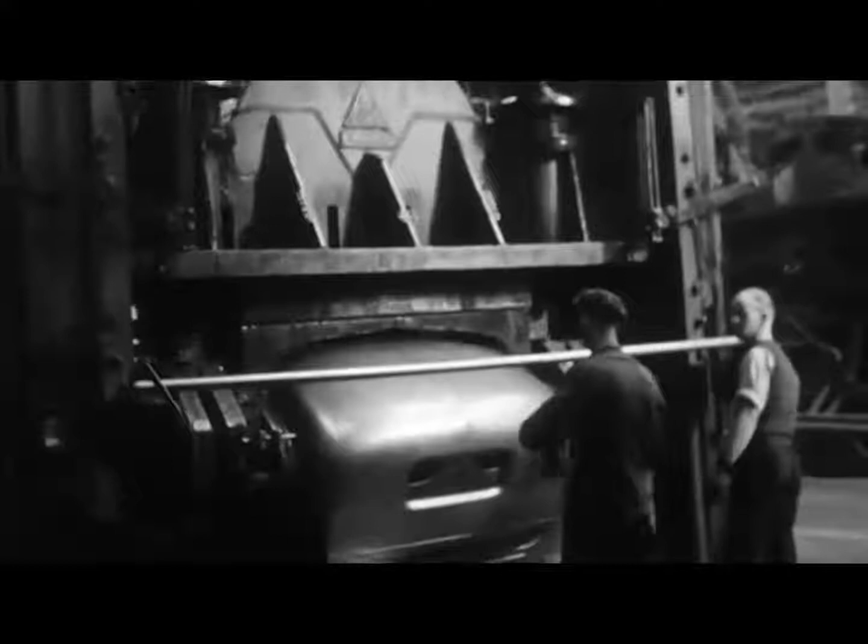Since the inception of manufacturing, factory owners have looked for ways to increase productivity and lower cost. This resulted in many of said factory owners looking to automation to help their bottom line.

So what is automation? According to the Merriam-Webster Dictionary, automation is the automatically controlled operation of an apparatus, process, or system by mechanical or electronic devices that take the place of human labor. What does that really mean?

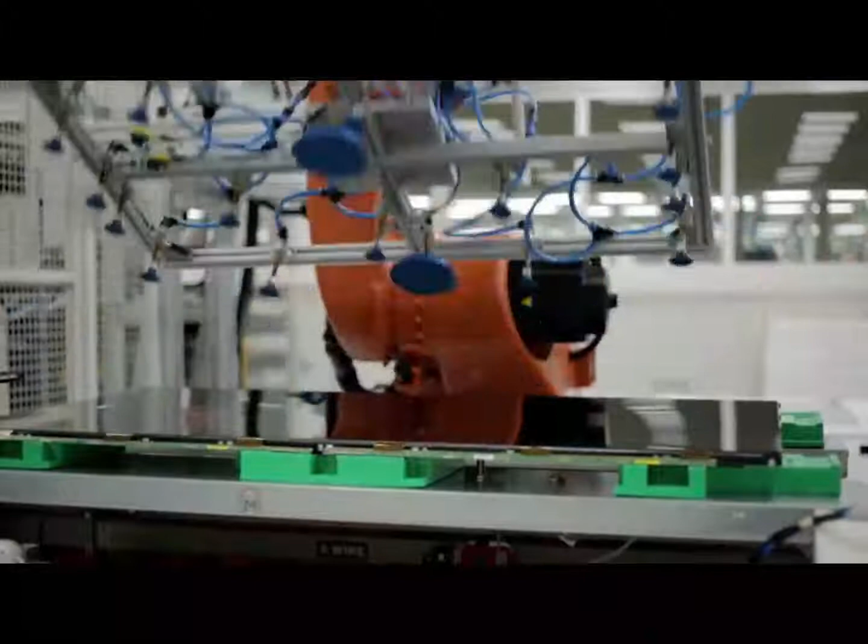If you walk inside a modern manufacturing plant, you might see something like this: robots and other automated machinery that can run typically without the need for human involvement.

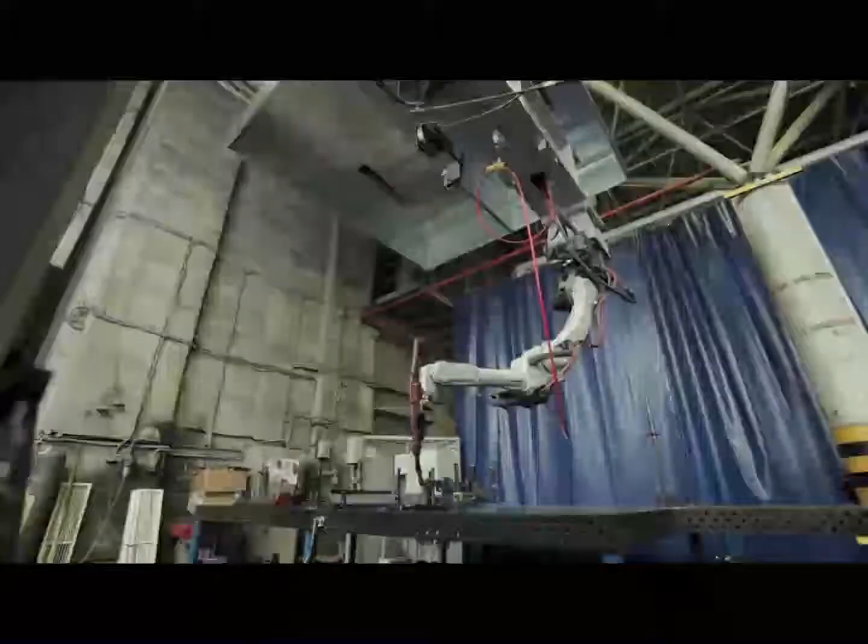Automation results in better efficiency. Let's face it, humans make mistakes, and they're not always very consistent. Automation practically eliminates error, increases productivity, and allows for better monitoring and control of the manufacturing process. Automation also allows for a certain task to be replicated over and over again.

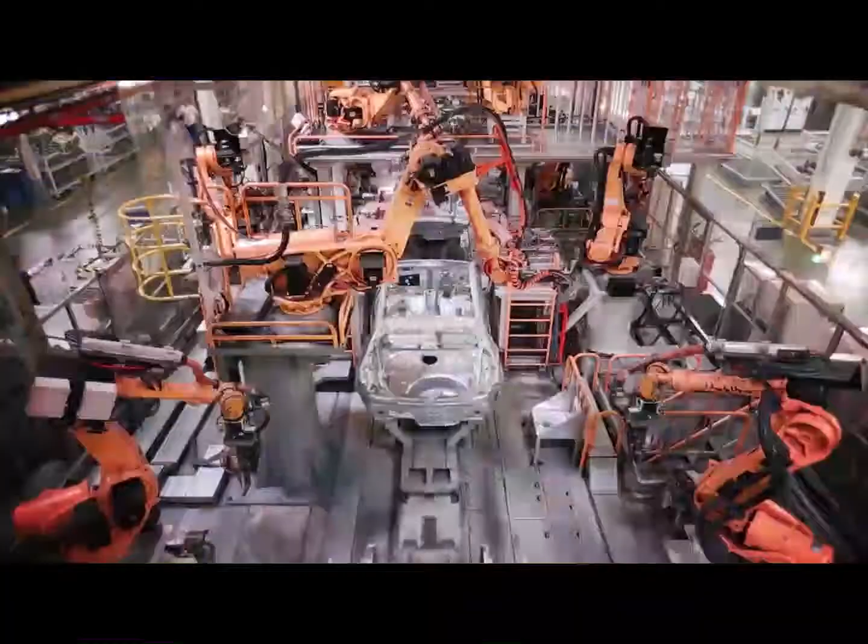Robotic automation started showing up in factories in the 1970s, and as time has passed, the technology has become even more sophisticated. As it advances even further, it is not outside the realm of possibility that one day manufacturing facilities could run without the need for humans on site at all.

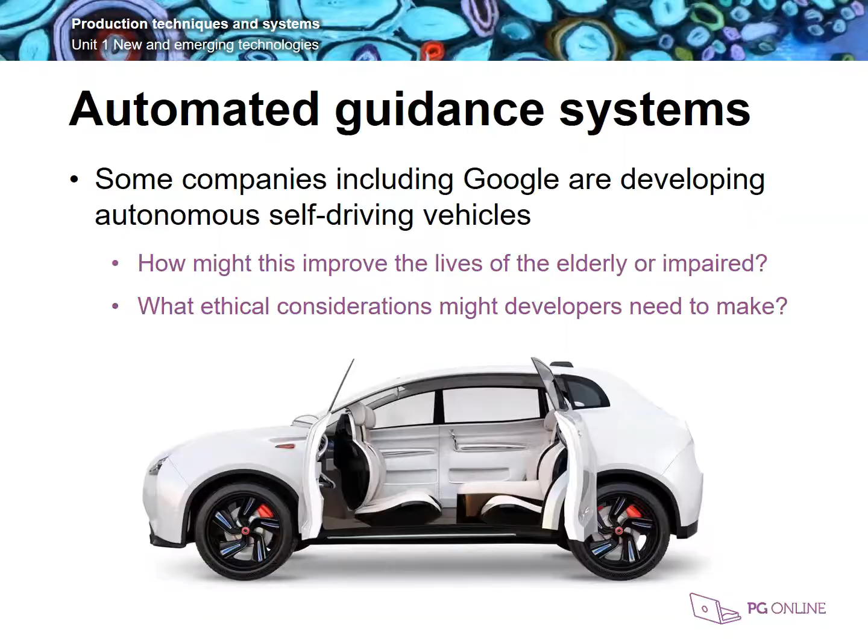Volvo Cars and Uber now present Volvo Cars' first autonomous drive-ready production vehicle, the next step in the strategic collaboration between both companies. The design is based on the refreshed Volvo XC90, with extra technology added to help support a safe introduction of autonomous driving.

The car's development is a part of Volvo Cars' commercial agreement with Uber for the delivery of autonomous drive-capable base cars.

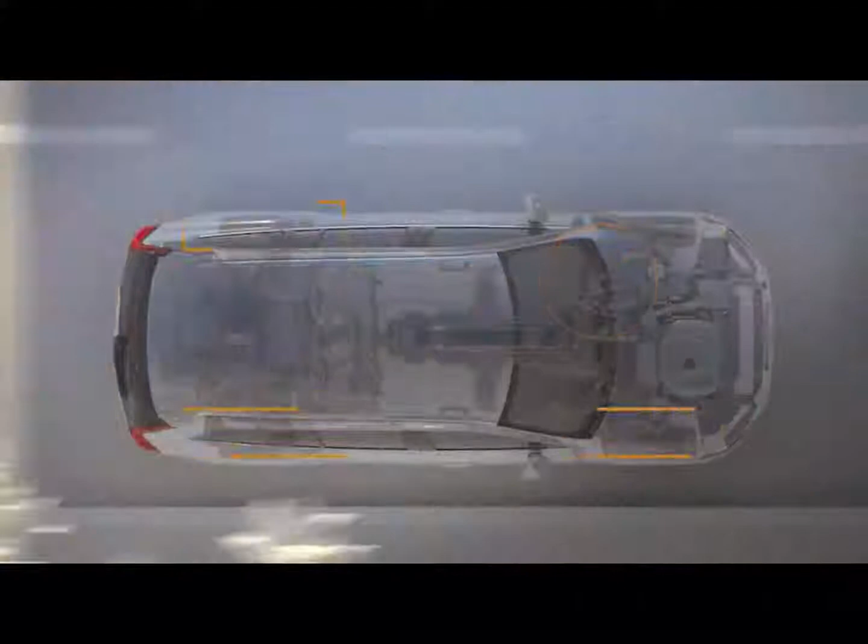An important feature of the autonomous drive-ready car is the inclusion of backup systems for functions such as steering, braking, and the 12-volt battery. This means that if any primary system would fail for some reason, the backup safety systems are designed to act immediately to bring the car to a stop.

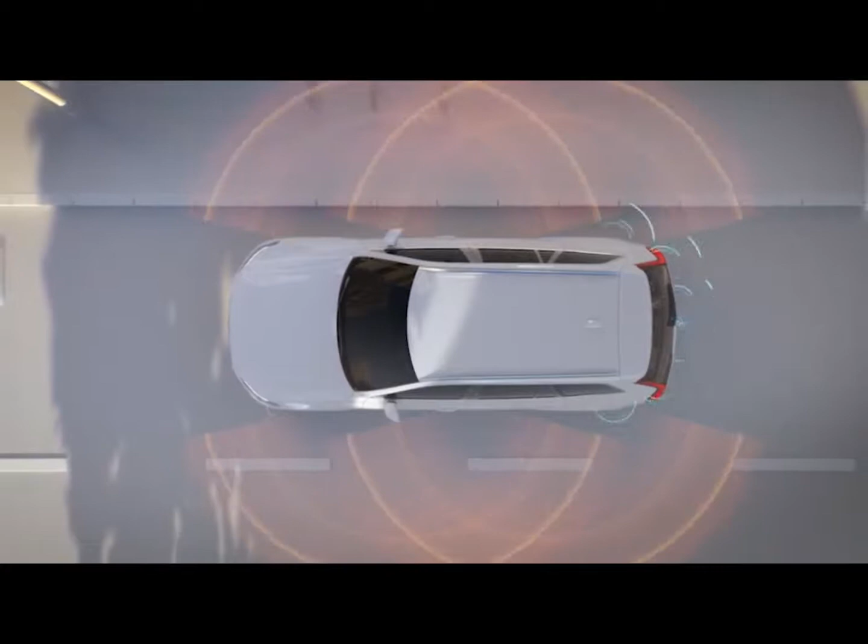Beyond this, an arrangement of ultrasonic sensors and cameras around the car create a 360-degree near-field perception capability designed to help the car safely monitor its close surroundings. The cameras are fitted with individual cleaning nozzles to maintain visibility while driving. A new vehicle motion control function translates a computer-calculated path into car movement.

Volvo Cars' first autonomous drive-ready production vehicle will be supplied to Uber as a base vehicle for Uber to modify with its own technology and systems, including its autonomous driving computer and roof box sensor kit that can enable the car to drive autonomously.

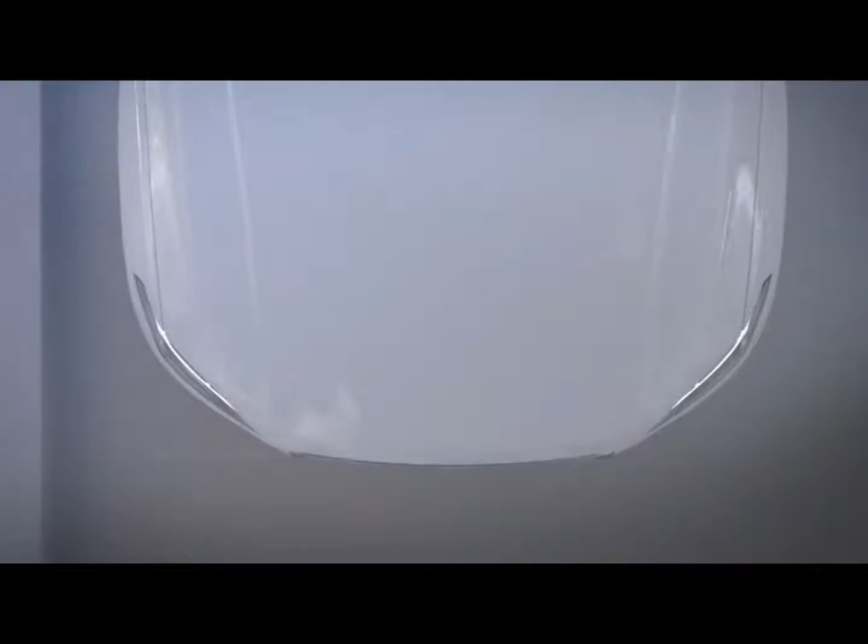Volvo Cars is developing a similar base vehicle concept for its future autonomous drive vehicles.

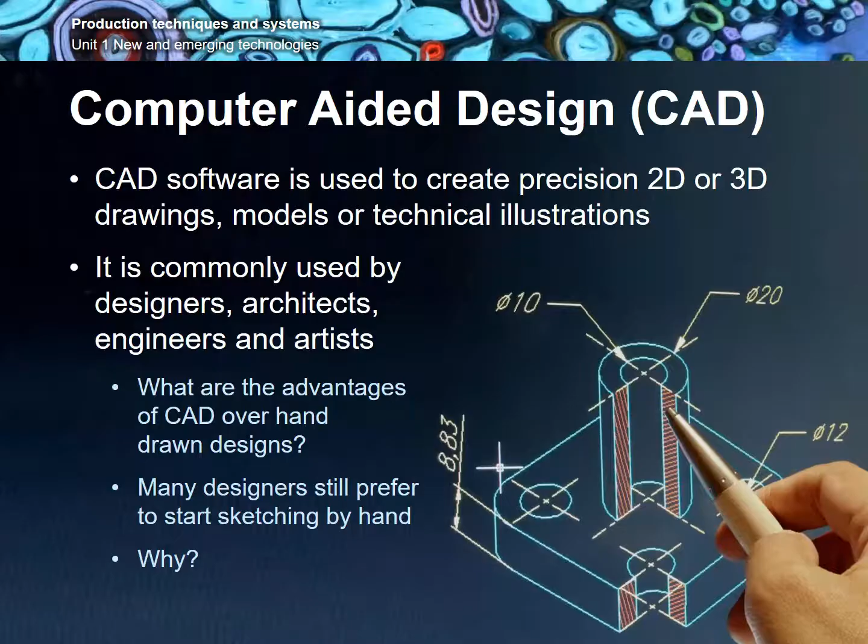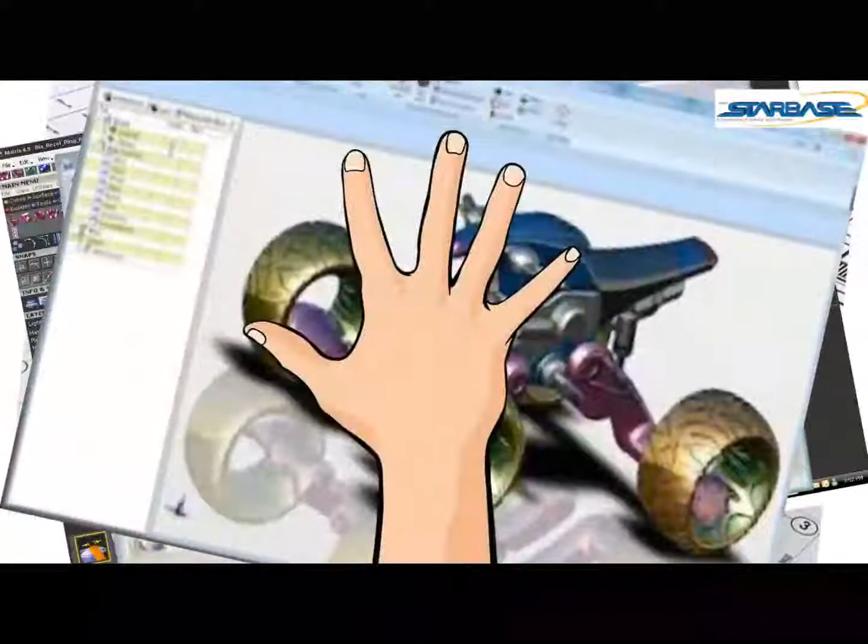What is CAD? CAD stands for Computer-Aided Design. What can you make using computer-aided design? Cars, houses, jewelry, engines, cool stuff, flip-flops, models, and pretty much anything.

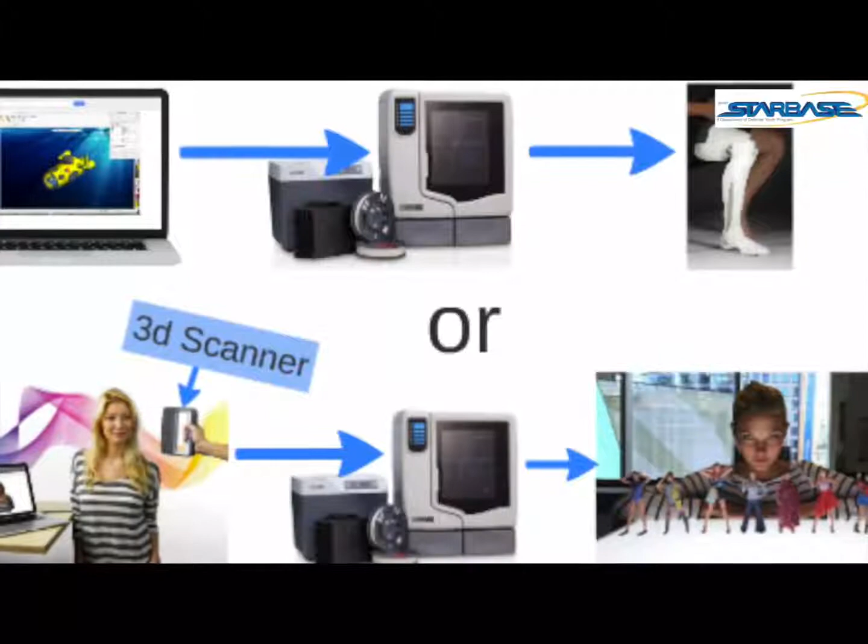How does it work, you ask? You can design on a computer and send it to a 3D printer. Or you can use a 3D scanner to scan a real object, then send it to a 3D printer.

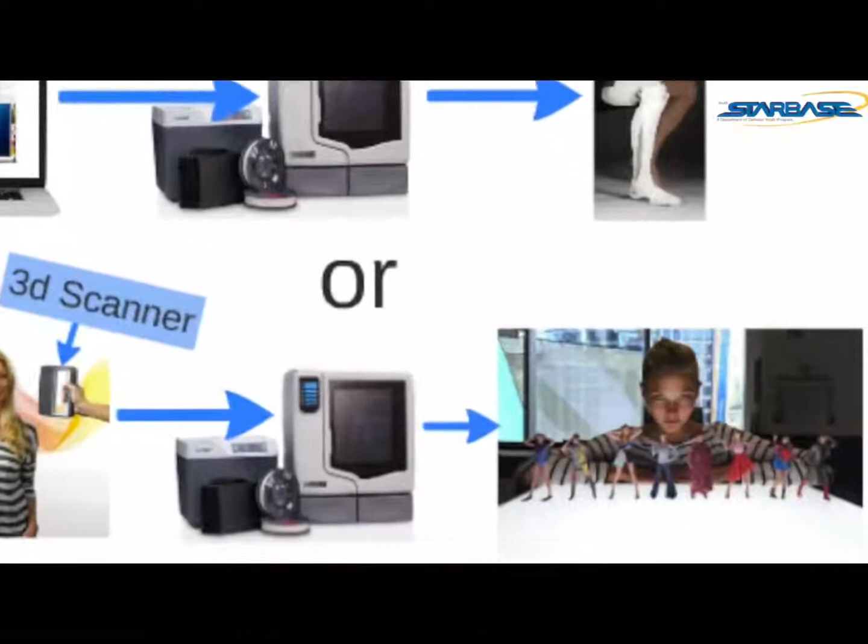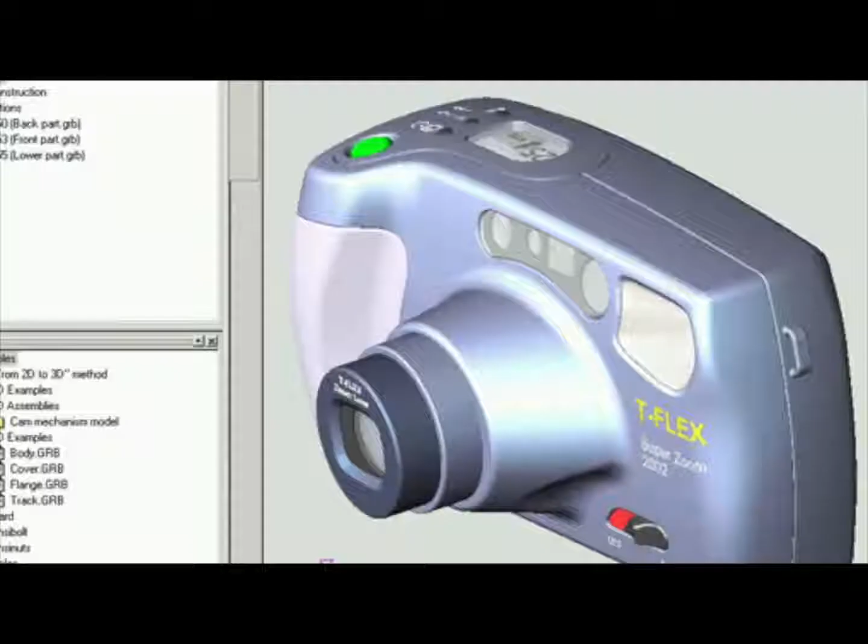Why don't engineers just use a pencil and paper anymore, you ask? It is easier to share your ideas using the internet. You can design with more accuracy. It is also easier to change a design using a computer than using a pencil and paper.

You can get a job at Google and this could be your office. Any questions?

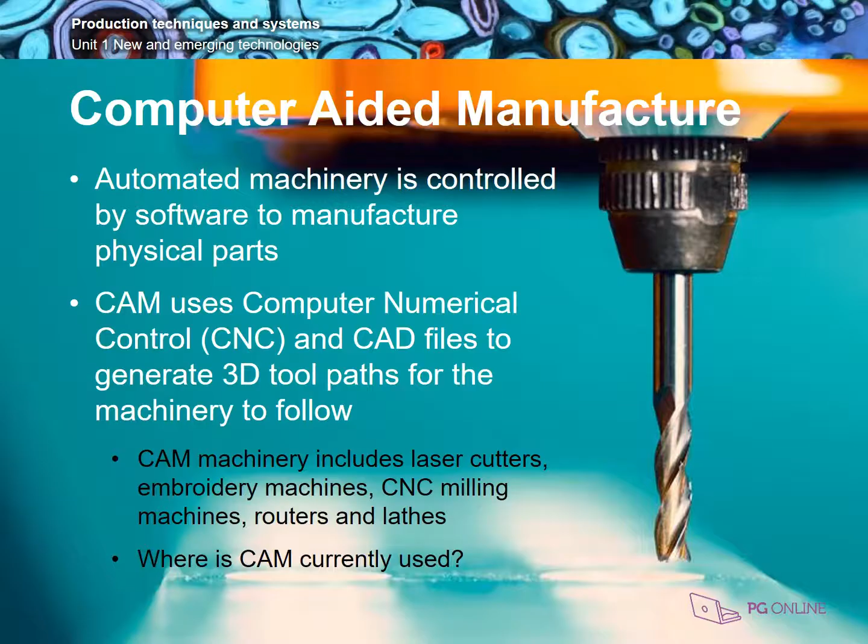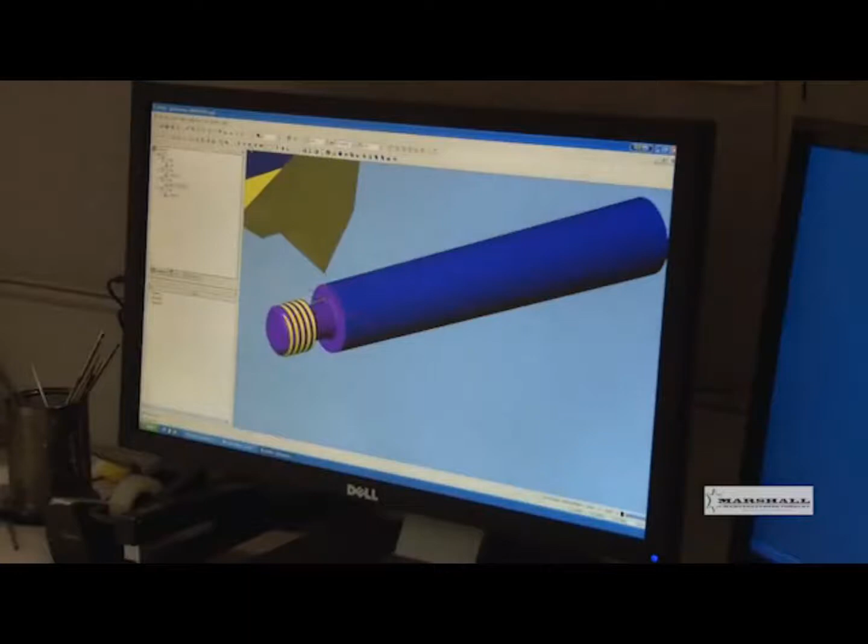This production centers upon CAM, or Computer-Aided Manufacturing. Computer-Aided Manufacturing, or CAM, utilizes the part geometry defined by the CAD drawing. That geometry is imported into the CAM software, which allows the engineer to select cutting paths and other process parameters for manufacturing a specific part.

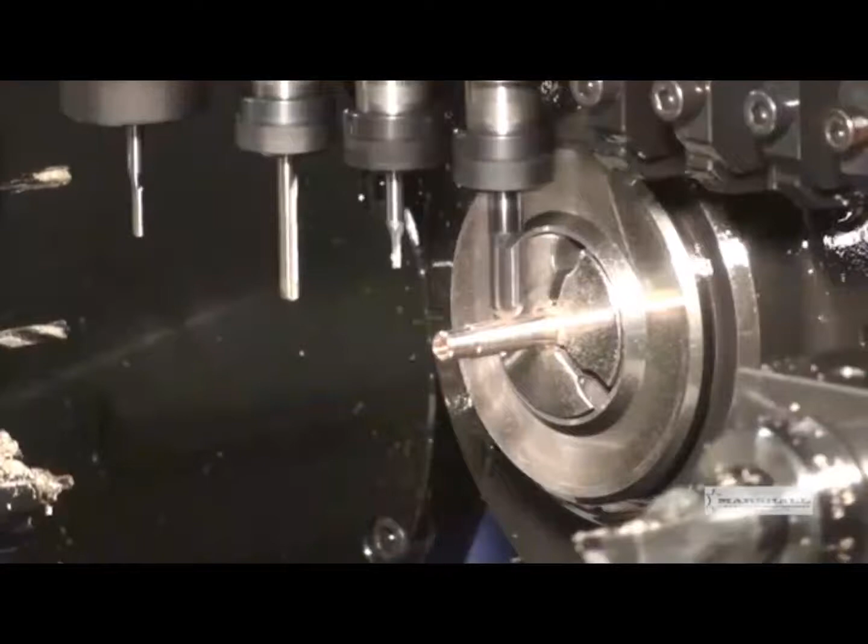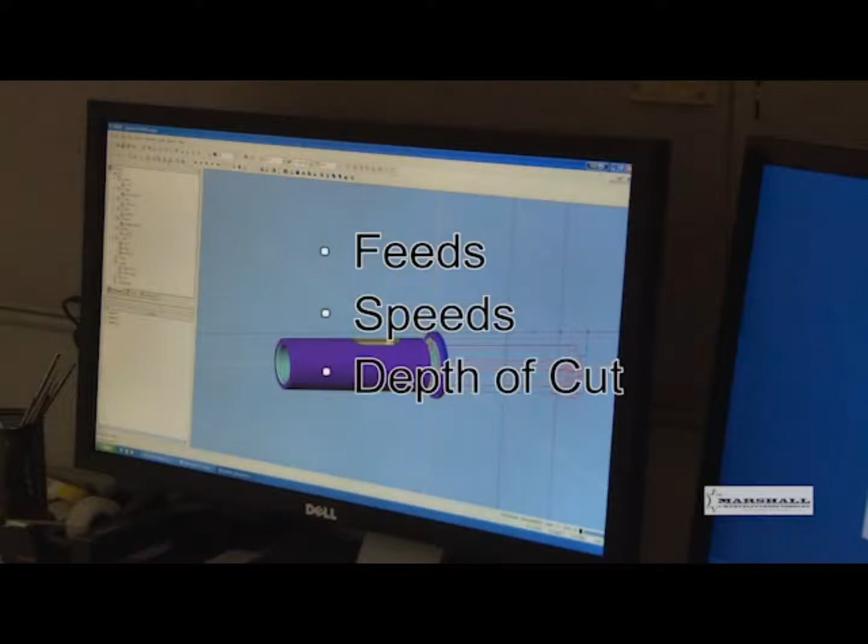CAM uses databases that are specific to the material, tools, and the work center to be used in the actual machining process. The programmer identifies the manufacturing process information utilizing the CAM software such as feeds, speeds, and depths of cut. This information is run through the post-processor, which translates the information into a CNC program that the work center can utilize directly.

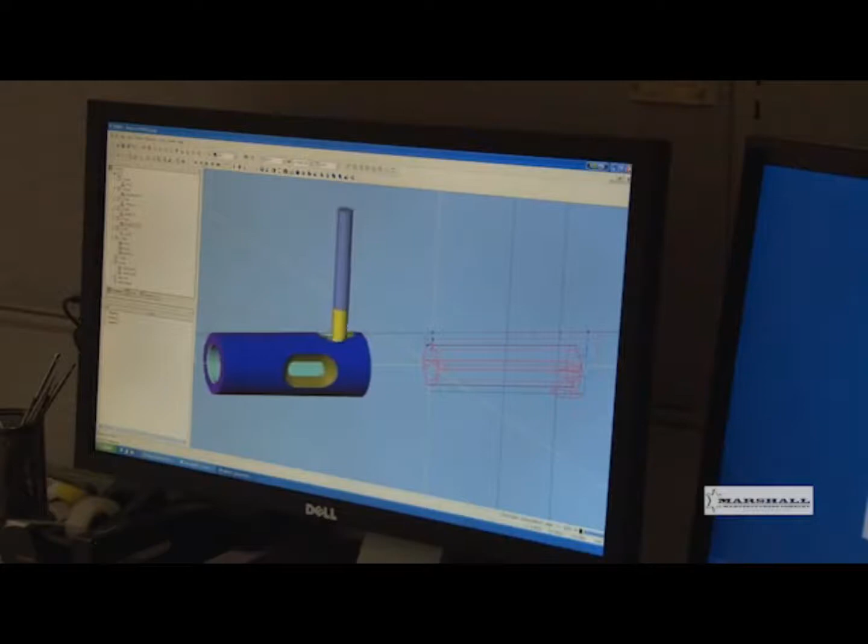The CAM system can also simulate a production cycle of the part, which includes a visual representation of the machine, tooling, and workpiece motion. The software can provide an estimated cycle time that can be used for quoting. It will also alert the engineer of any tool collisions, constraints, or interference that may occur.

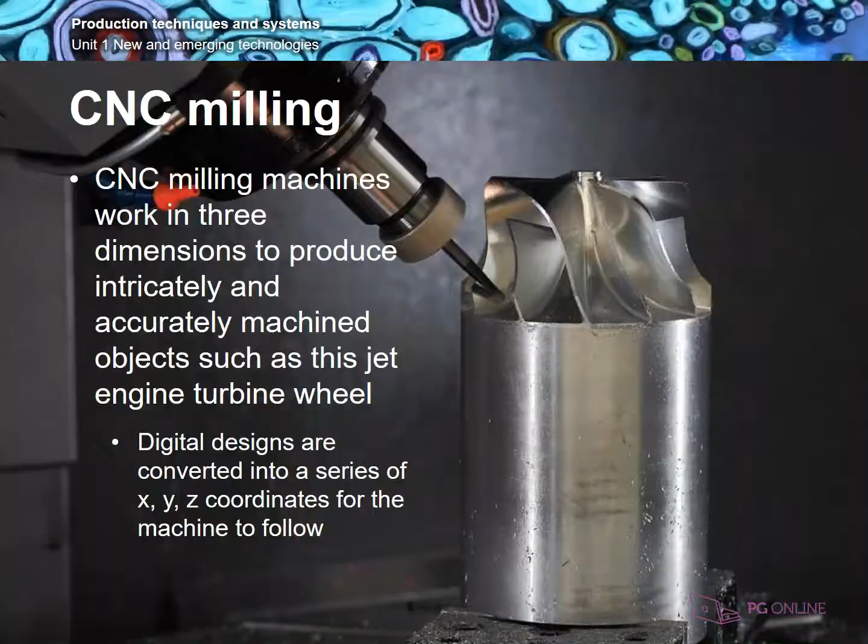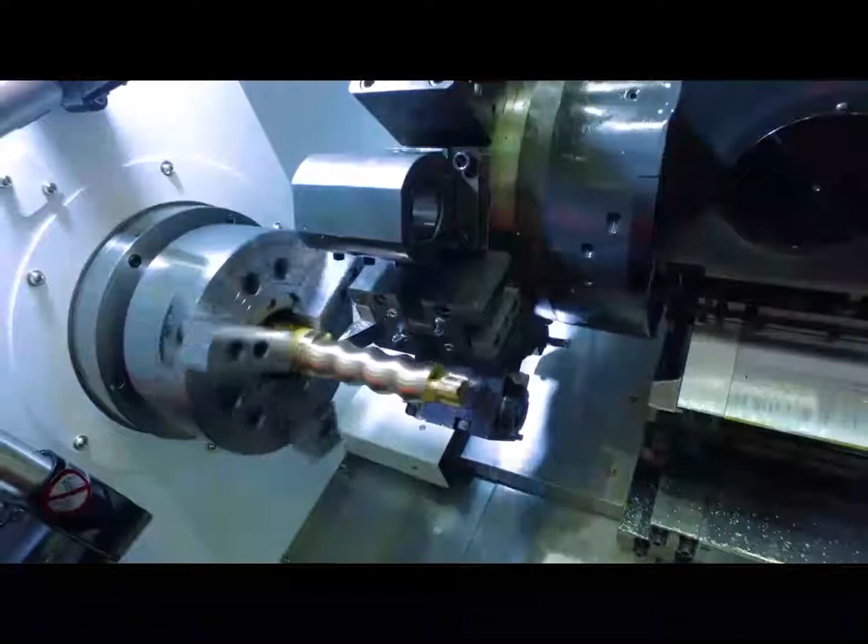If you've ever taken shop class in high school or watched an episode of How It's Made, you probably have some idea how lathes and other metalworking machines function. As technology and computers have improved over the years, a new high-precision computer-controlled manufacturing technique called CNC machining has spawned.

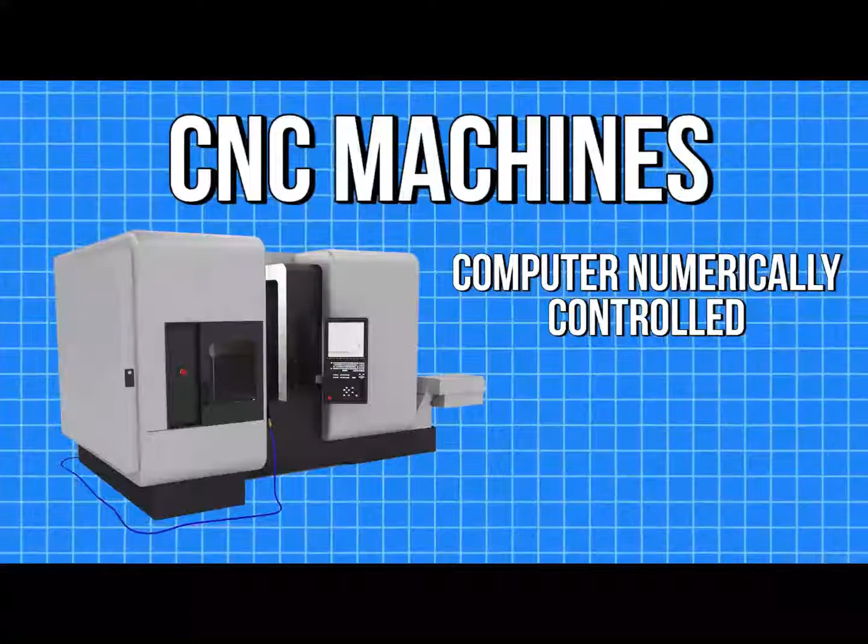CNC machines, or computer numerically controlled machines, are electromechanical devices that can manipulate tools around a varying number of axes, usually 3 or 5, with high precision per instruction from a computer program.

CNC machining is one of two ways that engineers, machinists, or makers can generate a physical part from a computer design file, with the other being 3D printing, known as additive manufacturing. The contrast between these two techniques is stark. CNC machining, like other machining processes, is a subtractive process, where material is removed from a stock. 3D printing, on the other hand, is an additive process, essentially functioning in reverse.

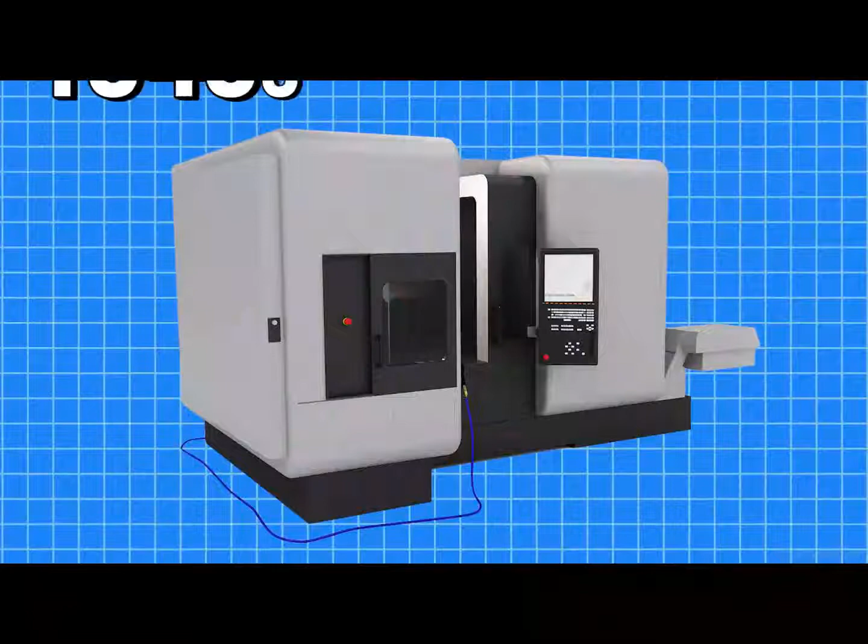The first CNC machines were developed in the 1940s and 50s and relied primarily on a data storage technique known as punched tape. The code to control the machines would be manually punched into a data card and fed into a system that would then interpret the data. Needless to say, these early machines were rudimentary and their functionality was limited.

CNC machining technologies rapidly grew as technological capability only accelerated in the late 20th century, which brings us to how modern CNC machines work. As mentioned before, machining is a way to transform a stock piece of material such as aluminum, steel, or titanium into a finished product or part.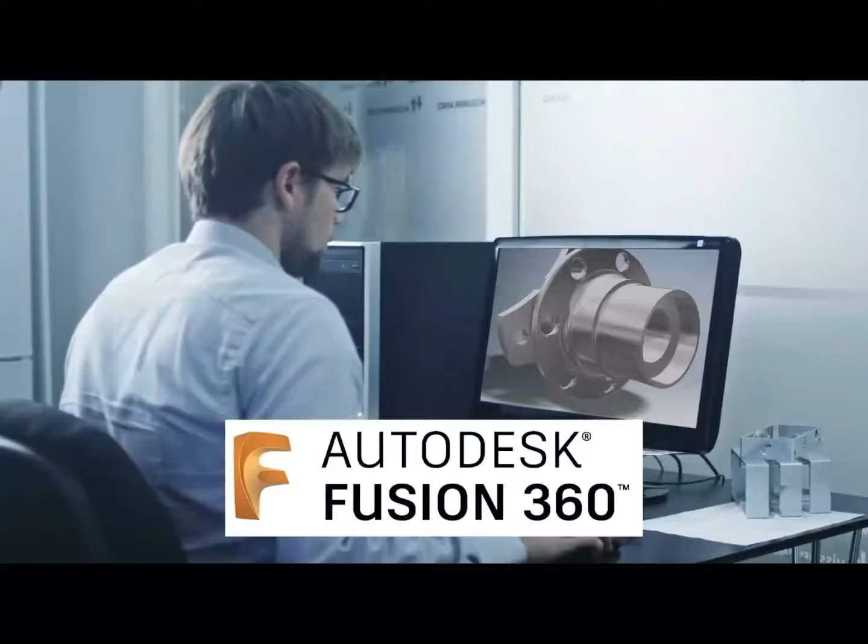CNC machines rely on digital instructions, specifically referred to as G-code. Before modern computer-aided manufacturing and computer-aided design programs such as Autodesk's Fusion 360 were around, machinists would manually write the G-code to control these machines. CAM programs today allow you to take a 3D model and automatically generate G-code that will drive the machine with little input.

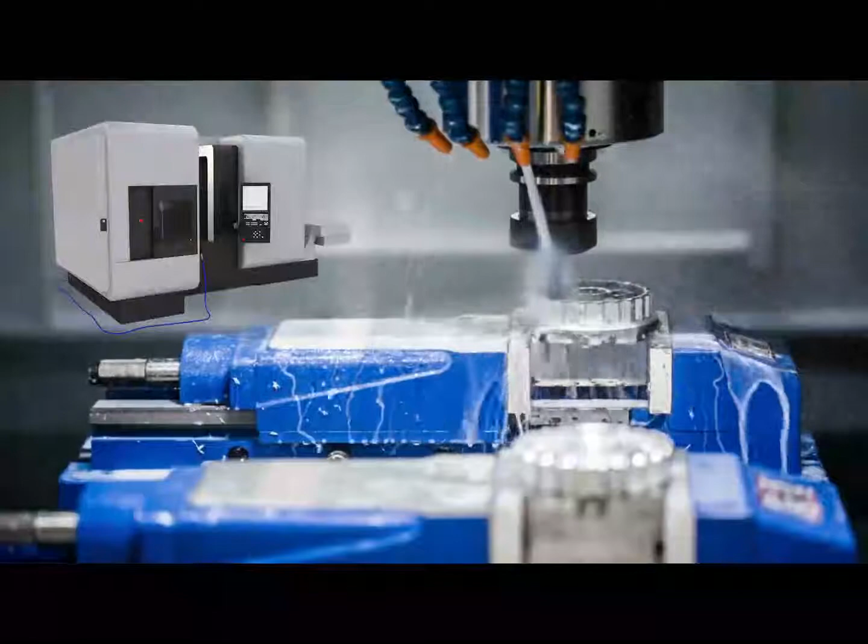When you compare the capabilities of automated CNC machining to the manual alternative like lathes and other machining techniques, you can start to see the benefits. CNC machines simply run faster at higher precision and accuracy while simultaneously allowing the transformation of a digital design into a physical part. Many designs or specific machining processes require the use of multiple tools to make cuts.

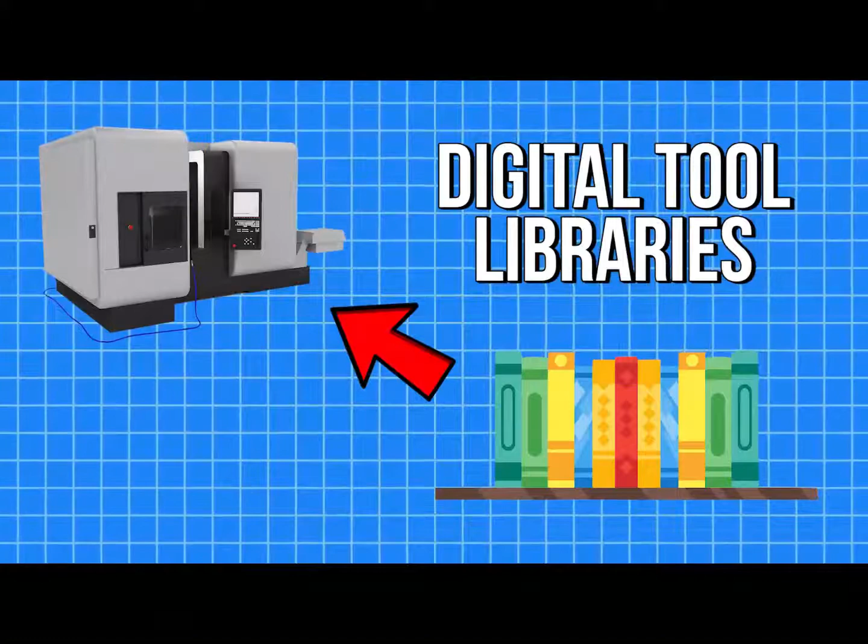One tool doesn't function universally. For this, machinists will often build digital tool libraries that interface with the physical CNC machine. These machines, often costing hundreds of thousands of dollars, can automatically switch tooling when directed by their digital instructions, allowing for them to become manufacturing workhorses.

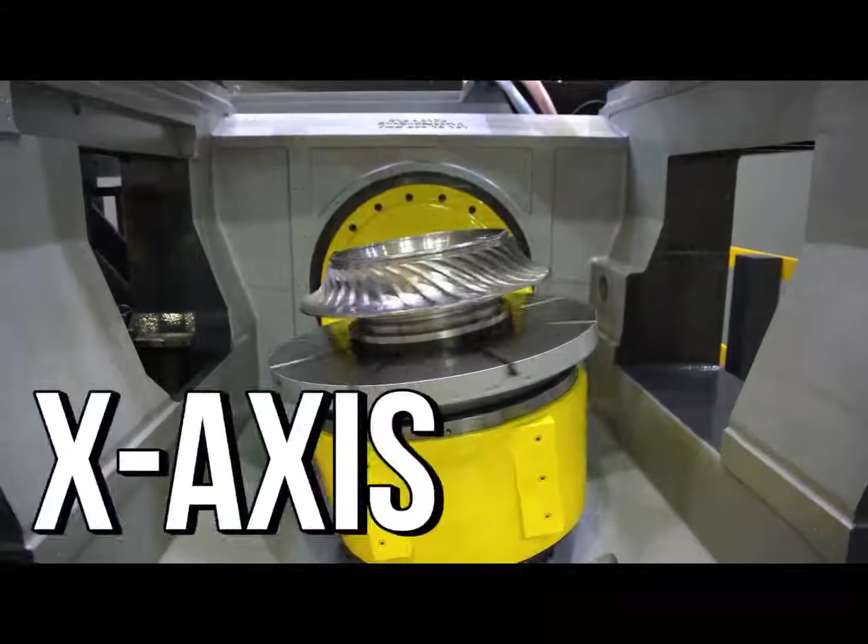Basic CNC machining will move one or two axes, referred to as the x-axis and the y-axis. You'll often hear the terms 2.5-axis, 3-axis, and 5-axis CNC machines, which simply refer to the degrees of freedom a machine can make cuts in.

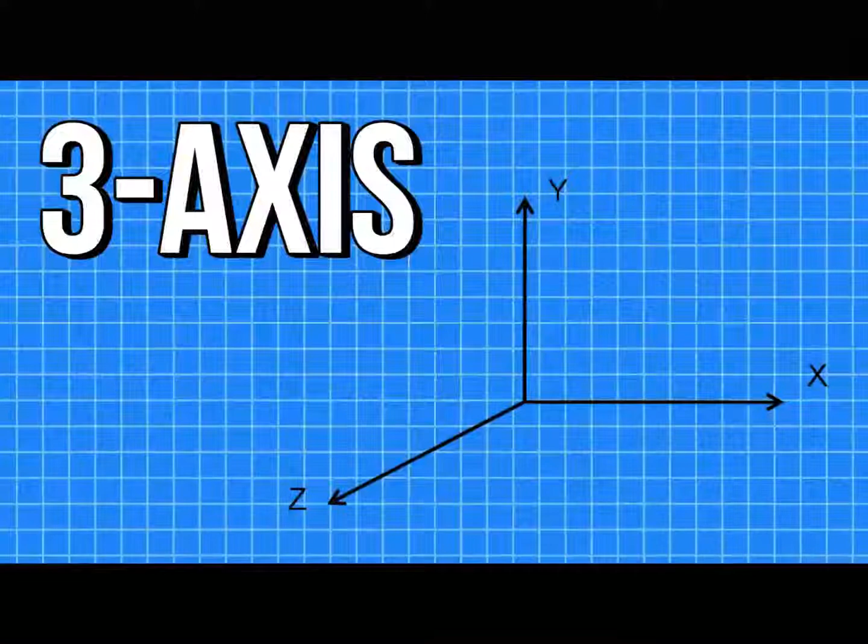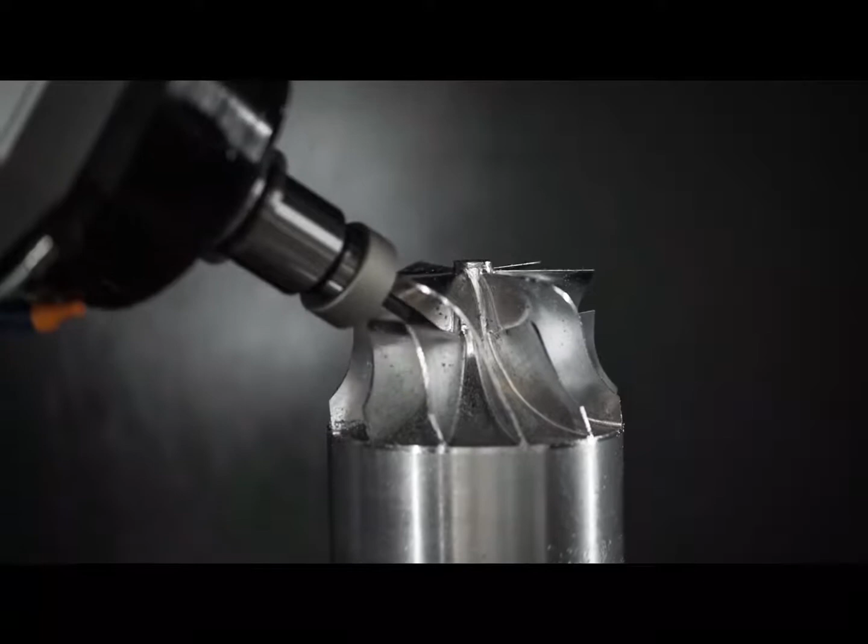A 3-axis machine will move in the x, y, and z-axis, whereas a 5-axis machine can move in these 3 axes along with 2 additional rotational axes. As you might be able to imagine, the possibilities of production with 5-axis machines are practically endless. 5-axis machines used to be relegated to high-precision work, but as they have become more affordable, they are quickly becoming standard in many shops.

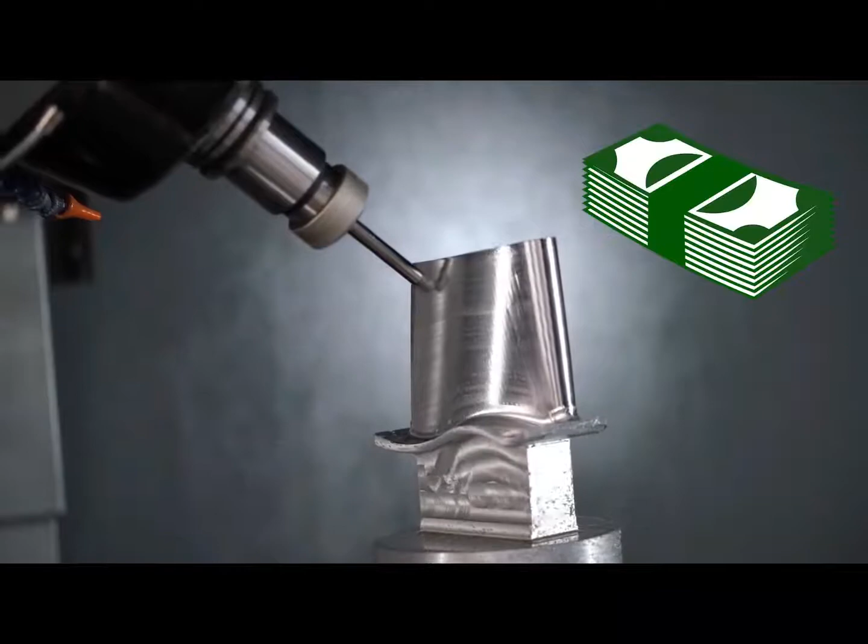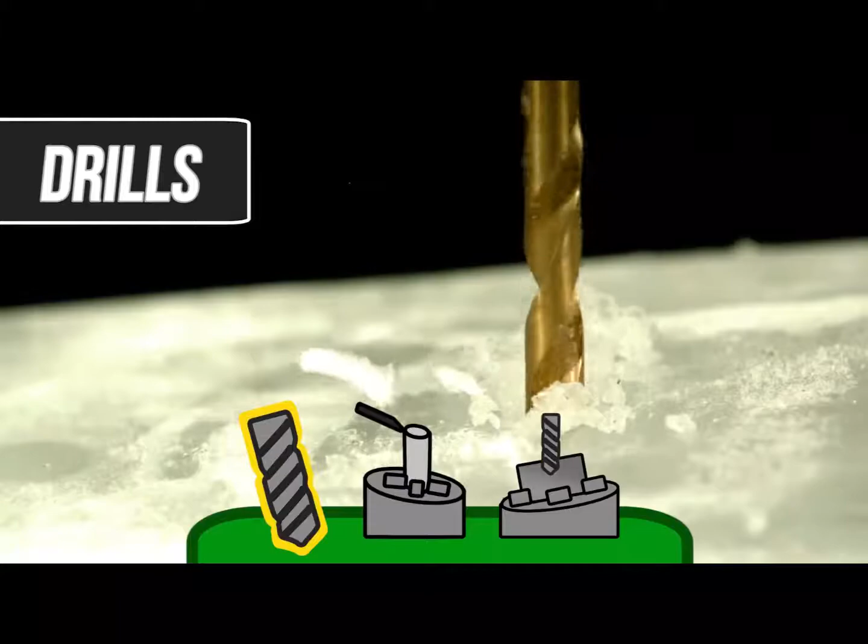There are 3 conventional machining technologies that you need to understand to grasp the basics of how material is removed from stock in CNC machines. The first being drills. Drills work by spinning a drill bit and moving the bit into contact with a stationary stock. Next, we have lathes, which function in reverse to drilling.

Lathes spin the block of material against a stationary drill bit or cutter to remove material in a circular or fluid path. The shape capabilities on lathes are more limited than other techniques, but modern technology does allow these machines to create things such as square holes or non-circular shapes.

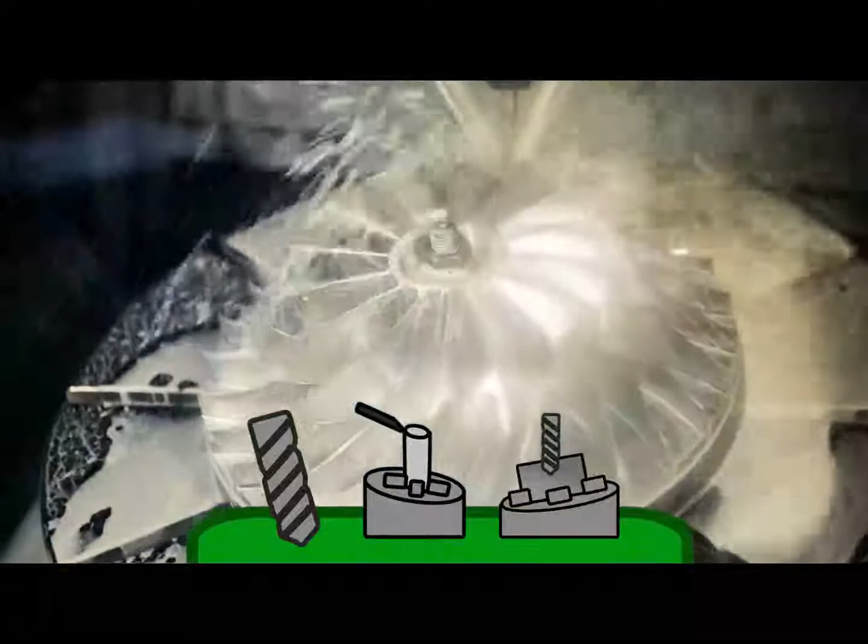Lastly, the most common CNC machine type is referred to as a milling machine. Milling machines involve the use of rotary cutting tools to remove material from a stock piece. These machines function similar to drills, with their tooling capabilities encompassing much more variety.

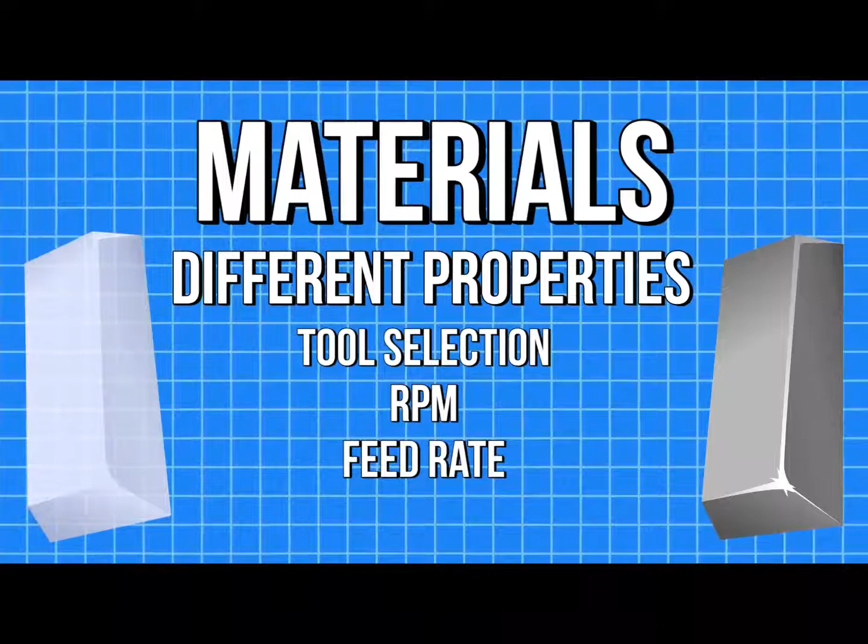Almost any material can be used in CNC machines, from plastic to titanium. Different materials have different properties, so machinists and engineers will overcome their unique challenges by altering machining variables like tool selection, RPM, feed rate, and coolant flow, among an extensive variety of other factors.

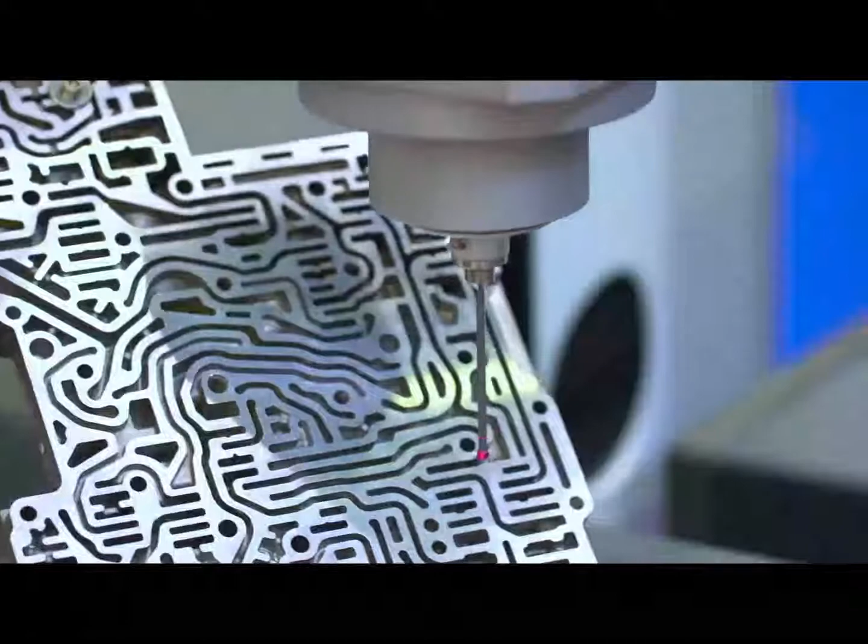CNC machined parts are all around you. They hold together your car and perform vital functions aboard SpaceX rockets. CNC machining is arguably the only way to produce high-precision metal parts for engineering designs across the world.

So, CNC machining is arguably the most significant manufacturing process of the 21st century, and its functionality drives technological advancement across the globe. It's a trade that is keeping up with the growth of technology, and machinists across the planet are changing the world with their CNC machining skills.